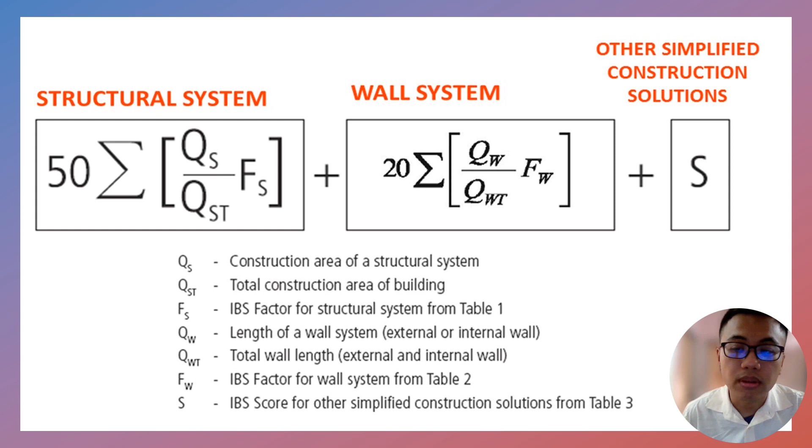Today I'm here to present about the positive impacts of IBS system. IBS system brings innovative methods and technologies that not only streamline construction process but also encourage sustainability, making it an essential component for sustainable growth. So there are some positive impacts of IBS system on construction for sustainable development. First is resource efficiency.

IBS promotes the use of prefabricated and standardized components in order to reduce material waste. As a result, companies may improve production processes and reduce unnecessary materials, resulting in more efficient resource utilization. The controlled industrial environment also allows for material recycling and reuse, which contributes to a more sustainable building strategy.

After that, time efficiency. IBS modular design enables parallel building operations, which drastically cuts down on project completion times. Shorter building times result in less resource consumption over time and less negative environmental effects than longer development periods. Shorter building timelines additionally minimize the impact on nearby population and ecosystem.

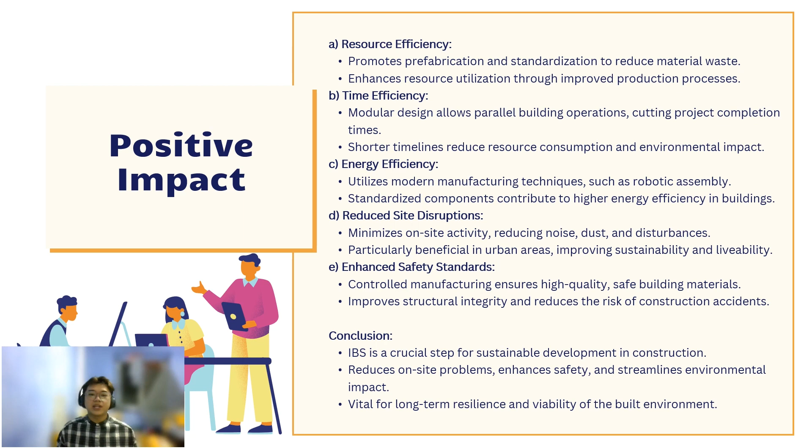So today I will present the IBS score of part A, which is the structural system. In this structural system, we evaluate the column, the beam, the slab, and also the roof trusses. Here are some of the examples that we use in our project: the precast column, the bubble deck and also the beam of the bubble deck. And last but not least is the prefabricated metal roof trusses.

So you may be curious, what is a bubble deck? The bubble deck is actually a precast slab, a half slab, with a lot of bubbles in it. It's very flexible for us in sizing our beams or adding beams, because when we remove the bubbles, that section can become our beam. Alright, so let's go next.

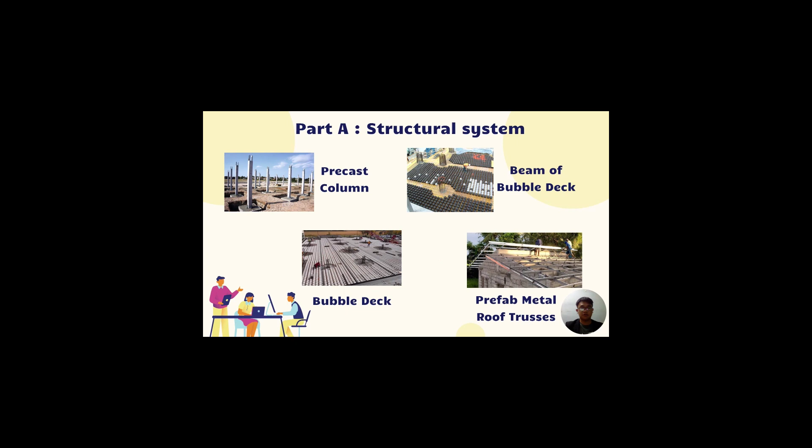I want to present the IBS score 1.1 about the floor. Like I mentioned, we use the bubble deck, which is a precast concrete slab, together with the precast column, and last but not least the in situ beam. This is flexible for our project when we want to add some beams in our bubble deck.

As you can see here, I wrote down the area of the ground level and level 1, which is 258 meters square, and in total we have 395 meters square. For this floor, the IBS factor is 0.8. We calculate 258 divided by 395, times the factor 0.8, times the total score of part A, which is 50 marks, and we get 26.

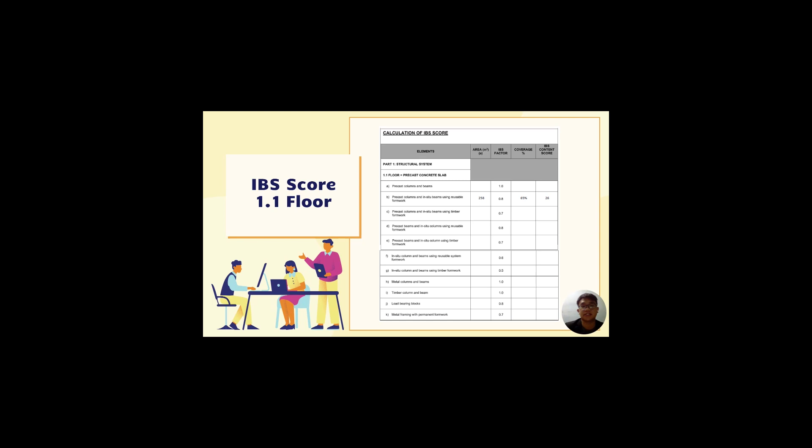So let's go to the second, which is the roof. Our roof system uses prefabricated metal roof trusses. In this project, we are using 137 meters square for this. The IBS factor is 1.0. We calculate 137 divided by 395, times the factor 1.0, times the total 50 marks of part A, and we get 17.5.

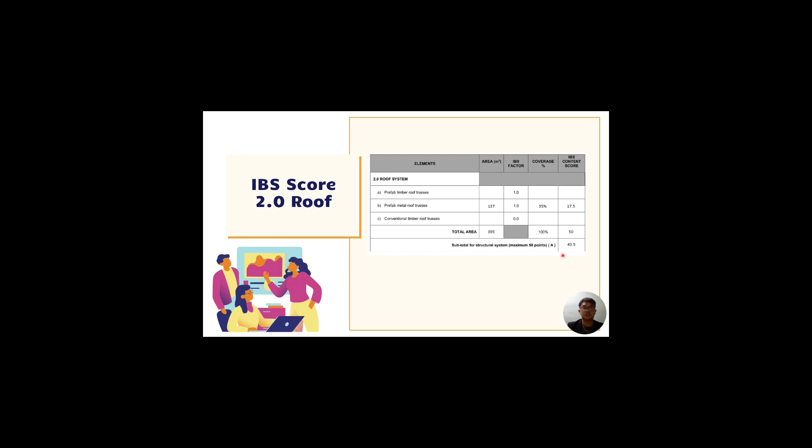So in total, part A will be 26 plus 17.5, and we get 43.5. So that's all for me.

Hi, my name is Sheng Sam. Matric number is 201332034. Now I'm going to present the calculation of IBS score part 2 and part 3.

In part 2, the IBS score covers the wall system. For the wall system, we use precast concrete wall panels, and part 3 is other simplified construction solutions, which are the precast concrete slab panels, precast concrete beam, precast concrete column, and also doors and windows. We use an IBS manufacturer.

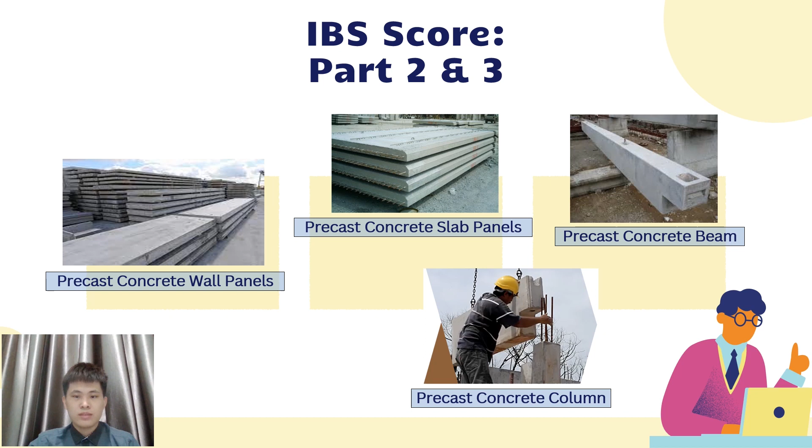So in the part 2 calculation, the wall system, we calculate the ground floor and first floor, with total length of 144. The coverage is 100%. We use the wall system for all walls. Hence we multiply by the IBS factor 1.0.

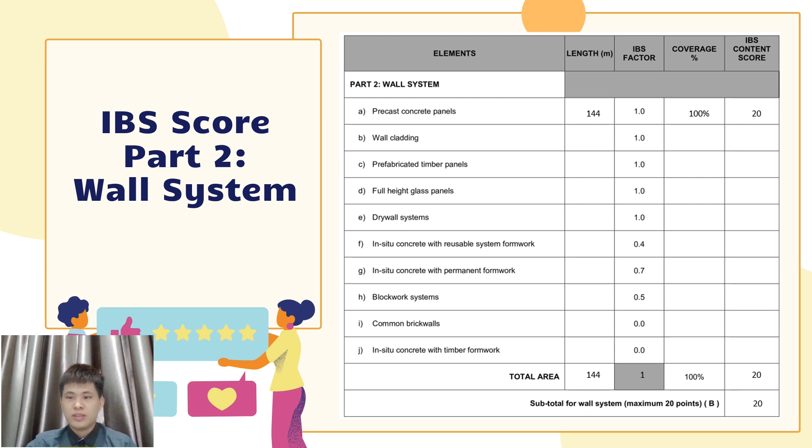For the total area is 144 and the maximum score is 20. Hence we get the 20 score for the IBS in part 2.

Next, for IBS score part 3, we calculate for the other simplified construction solution. In this part, we will calculate for the utilization of standard components based on MS1064, which have beam, column, wall, slab, doors, and windows. For the IBS, the usage of beam is 79%, column is 100%, wall is 100%, slab is 10.9%, door is 83%, window is 63%.

Because the slab is 10.9%, which has not satisfied the IBS score percentage usage, we get 0 for the IBS score for slab. For the other components, we get the full mark of the IBS score, which is 4, and also 2 for the window. Hence we get the maximum score of 18 in this part over 30 marks. After calculation, we get 81.5 total for the IBS score in this project.

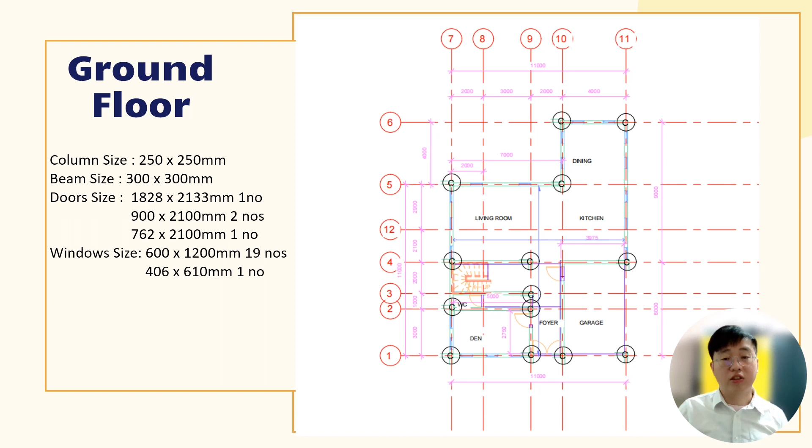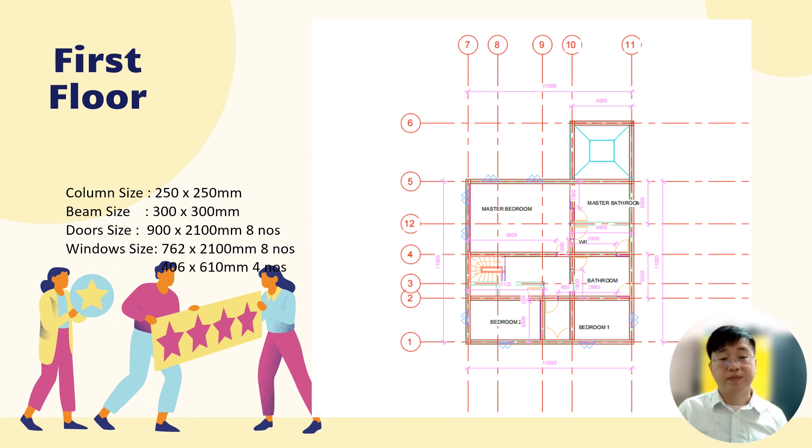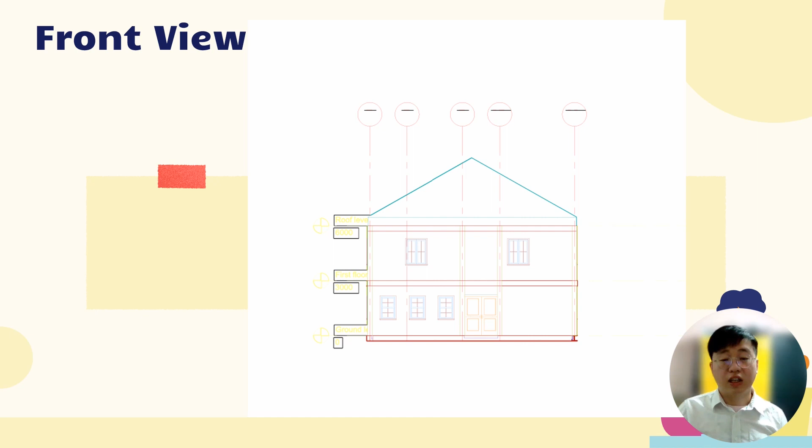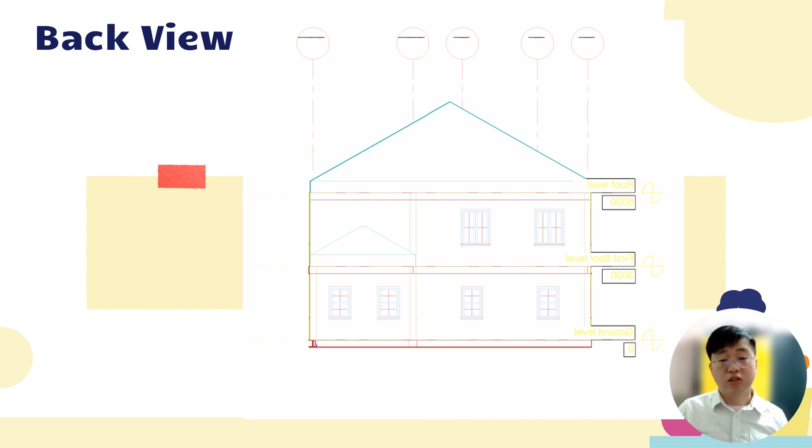Now I'm going to present the front view of the house. From the front view of the building, we can see that there are 3 windows for the ground floor at the front, and 2 windows at the first floor, and there are the front door and the garage at the right side. For the back view, we can see that there are 6 windows, which are 2 windows for the dining room and 2 windows for the living room, and there are 2 larger windows for the master bedroom at the first floor.

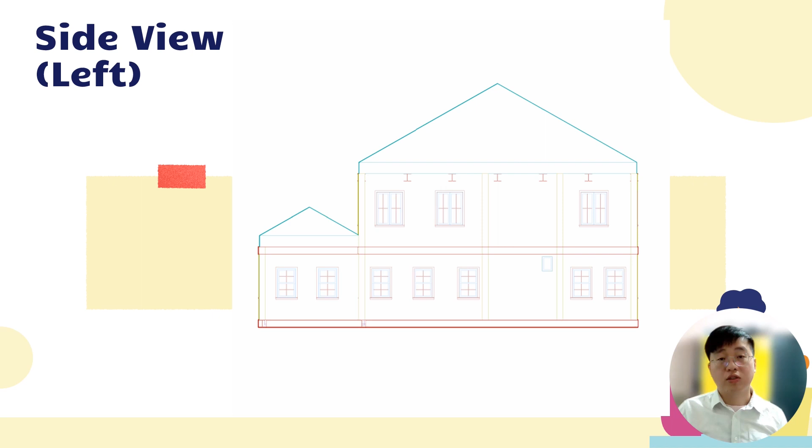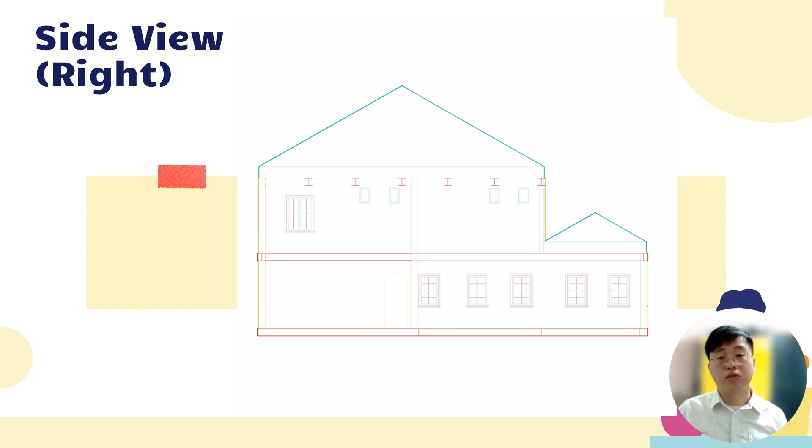In conclusion, this double-story house project's IBS score is 81.5%, which satisfies the mini project requirement of 70%. This IBS score emphasizes modern building techniques and highlights the precision, efficiency and forward thinking of construction. Aiming for a higher IBS score can accelerate construction, enhance safety and ensure lasting integrity.